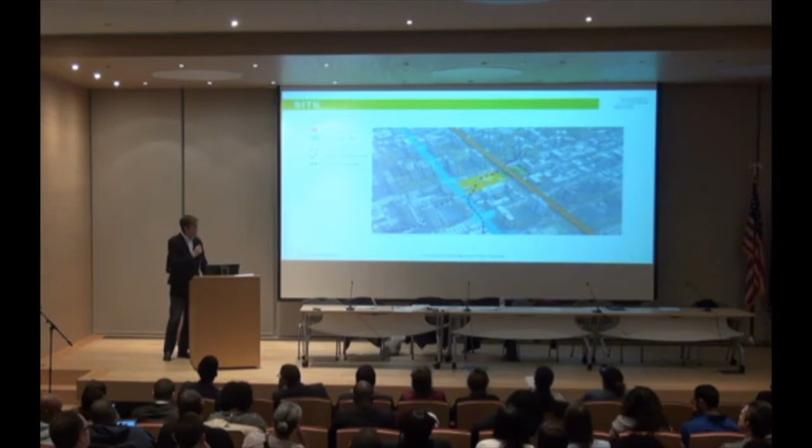This also shows you the characteristics of the streets, which you know well: a somewhat strong retail presence on Madison Avenue, less so elsewhere, and certainly the elevated railroad on Park Avenue. Those conditions gave us some fuel for thinking about how we would organize the massing of the site.

This diagram shows our conceptual thinking when we first approached this in the design competition, thinking about taking as much floor area as would normally fit within the zoning envelope of the block, and how we could reorganize that to provide up to approximately 650 affordable housing units.

It's a very dense site, very ambitious in terms of our programming. On top of that are the 4 different community partners that Sarah was just mentioning, and this gives you an idea of what our thoughts were.

So this would be the block as it normally would be conceived, and those little missing teeth in the continuity of the street wall are actually out parcels. They're not part of our site or property of the city, so they weren't included in our design response, but we had to work with that and work around it.

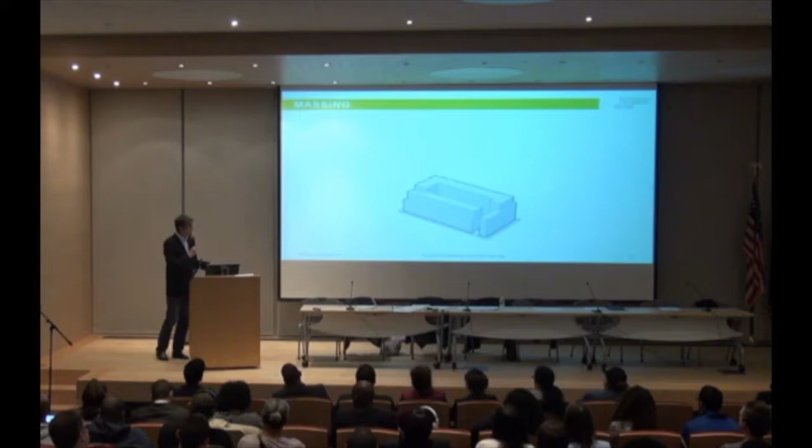So imagine removing a portion of that continuous street wall to provide space for the 4 community gardens we're also preserving on this block, but rearranged in a different location than they are currently. Our goal was to place those gardens on the south side of the block to maximize daylight and sunlight opportunities for those gardens so that they could thrive and grow.

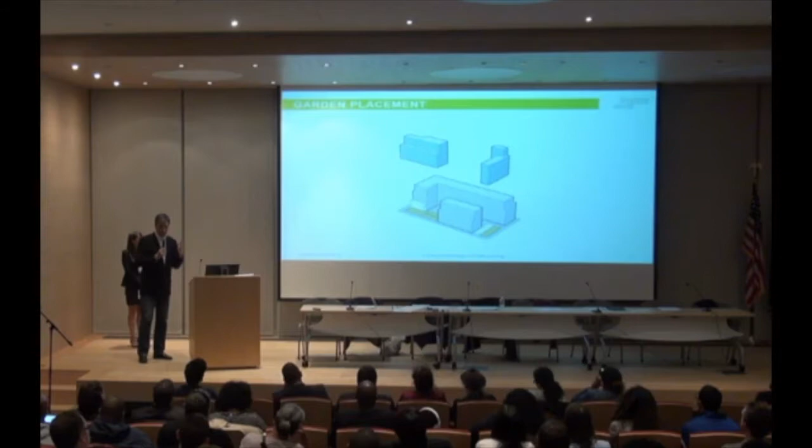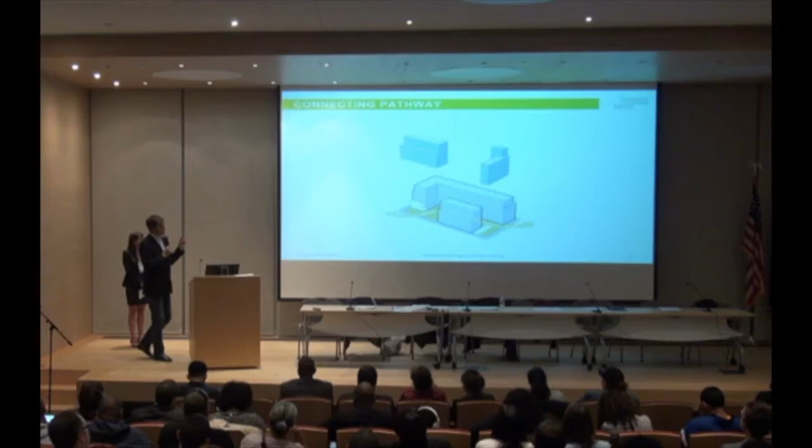And then you'll see a center space in the middle of the block. That was the idea of creating this new path, this new public access to the center court of the whole block, so there's a public access concept linking the community gardens as well as the center courtyard space, all publicly accessible.

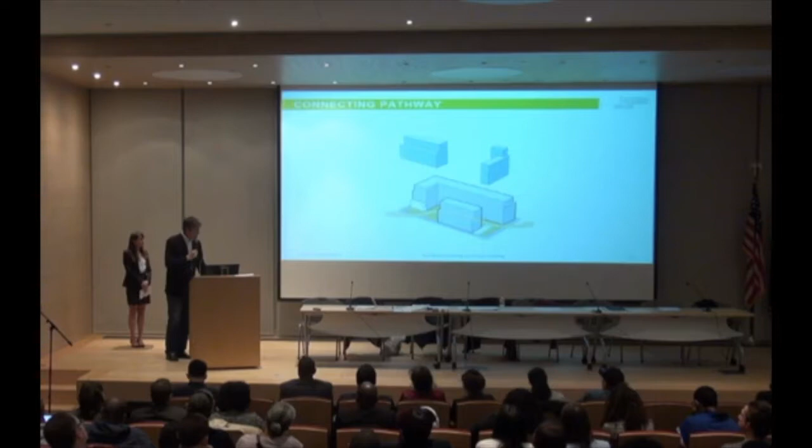Then we looked at lowering the height of the south building, what we call Building C, along 111th Street, in order to gain more light into the block, particularly the center, as well as to enhance daylight conditions for all the new housing units composed within the building blocks themselves.

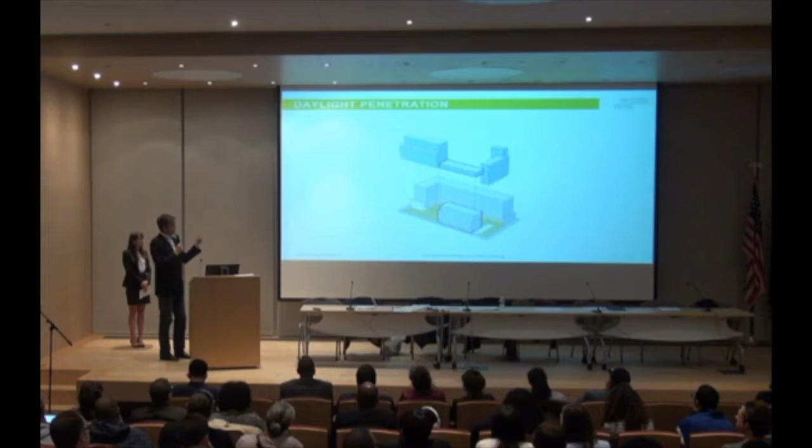And then all that dark blue stuff up there—we're elevating the center court approximately 12 feet to accommodate some very large volume spaces that comprise the community facilities in the basement of the building. I'll show you some plan diagrams of how that works.

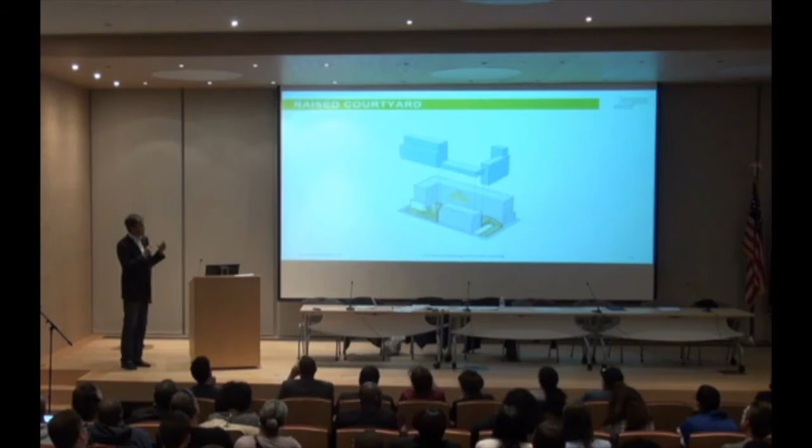So we're elevating the ground plane, if you will, in the center court and providing connections for the public through that center space, lifted up 12 feet off the street level.

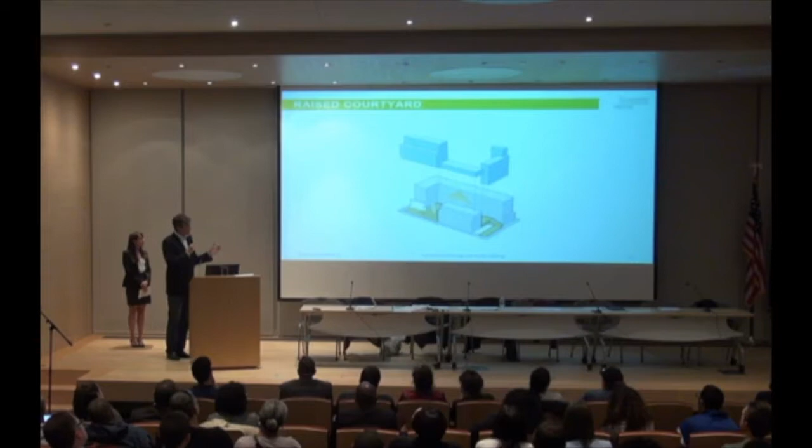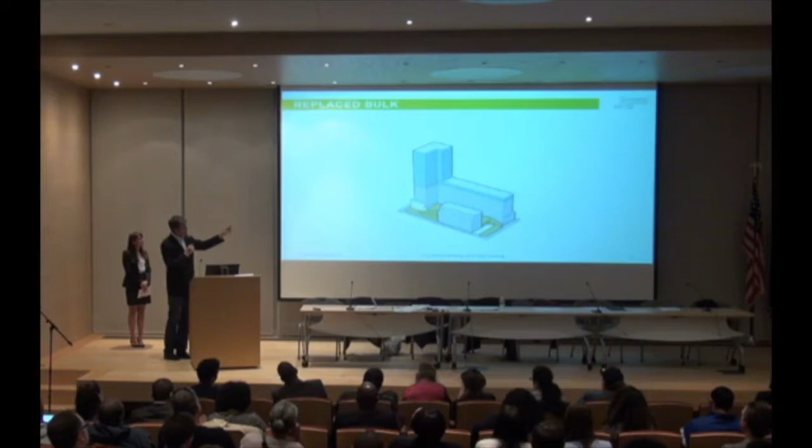And then all that floor area, in order to get to our 650 units of affordable housing, gets concentrated on the northwest corner in a tower, what we call Building A, with a bit more piled on top of the school on the 112th Street side, which is Building B. That was the way we conceived of organizing the block to maximize daylight around the center and get southeast, southwest light into the center of the block.

This is the basic composition of the project and its size: over approximately 655 affordable units. The total gross floor area of the project, including the basements, is about 780,000 square feet.

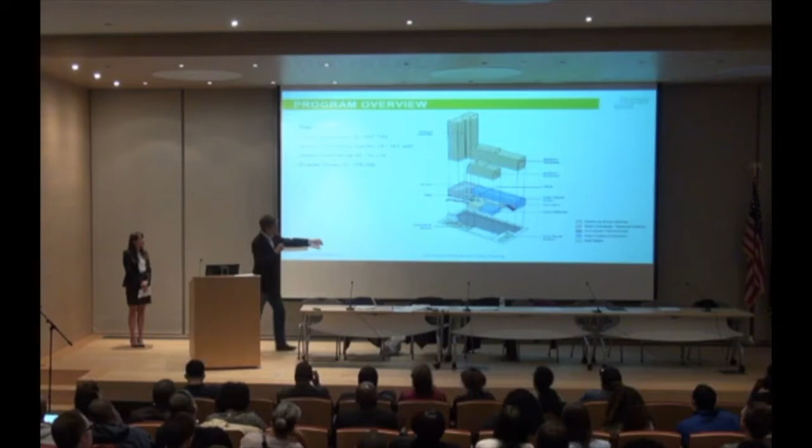You can see the major components: yellow above is residential, and a small piece here, also on 111th Street, is Union Settlement, which comprises a portion of the 111th Street frontage. The Dream Charter School takes up a significant portion of the 112th Street frontage, from the corner of Park Avenue to about the mid-block portion. The YMCA, as well as Mount Sinai, have entrances along 112th Street.

And then on Madison Avenue here, there's some retail frontage on the ground floor plane.

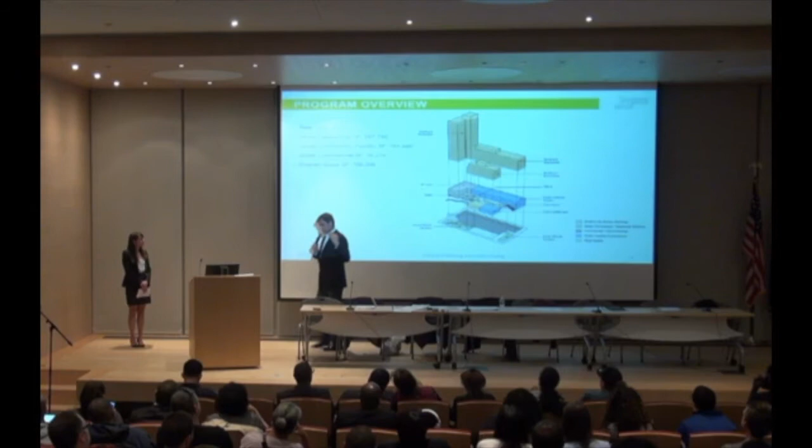So this is a ground plan. We're looking at mostly the first floor, and then the center portion, where you can see a basketball court laid out on the right, and two swimming pools laid out on the left, with an auditorium in the middle. Those components are down about 12 feet below grade, but because of the volume, a space like this has to stick up another 12 feet or so.

So that is how the center of the site is organized, with the public accessible space in the center. You can see the 4 community gardens laid out side by side, two and two. That white spot is the out parcel I was talking about before. Each of the arrows along the upper portion of the plan show the different entry points to the school at the corner, the residential portion of Building B, which is that brown zone in the center. The YMCA entrance is the blue area, another residential lobby, and then the retail space and the Mount Sinai office space entrances connected there too.

And then Union Settlement is the blue area in the bottom right, and then a residential lobby and support spaces for the residential component above that.

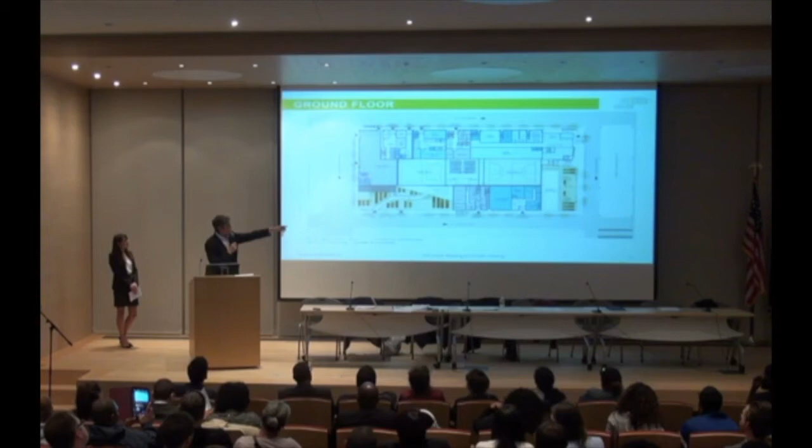This is the second level plan, and it really shows our conceptual layout for the open space in the center. This has not been detailed nor finely programmed yet—that's going to be part of our process. I'm sure there's going to be a lot of input from the community in terms of how all that worked, but our design intention was to create little pockets of space on the second level for each of the community partners to have some outdoor access space.

For example, Mount Sinai might have a health court over here. The school might have an outdoor eating area right off the cafeteria. Fitness spaces over here for the Y might be able to expand out into the open space. And the senior housing located here might have what we call a porch facing out, using part of that space. The layout is really intended to create a nice connection from one end to the other.

At the far end—does this have a zapper or laser? I don't want to press the wrong button.

There we go. So you see here a grand stair that connects the sidewalk on Park Avenue up onto the court, and then back down a ramp that links the other two community gardens right down to grade.

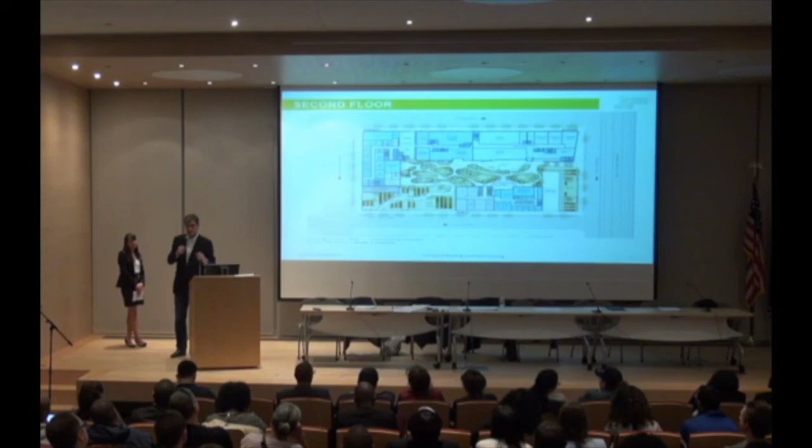This is a fully accessible outdoor space, and the gardens are fully accessible also. There's an elevator located here, combined with a stair, in order to get up that 12 feet to the center court space. All that is intended to be an open flow of pedestrian and community use in the center portion, and then the community gardens are connected by a sinuous ramp that comes down and connects to the corner at Madison Avenue.

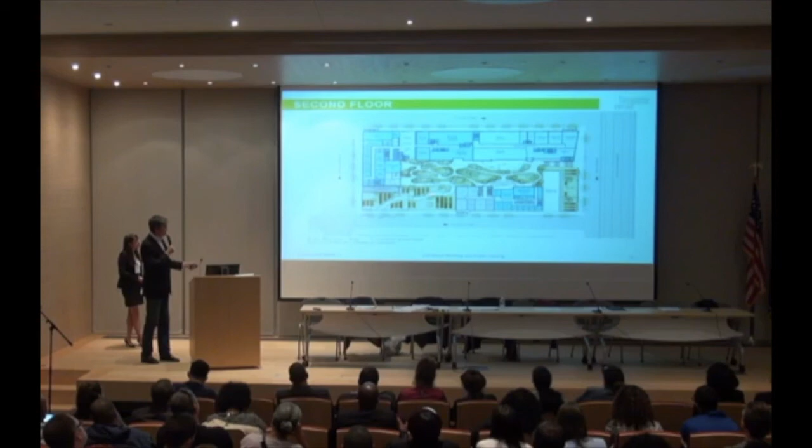Oh, lost the button. There we go.

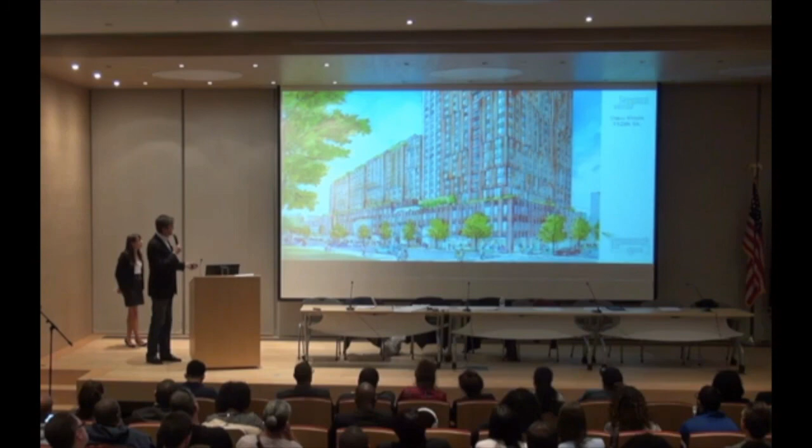The goal in our design approach for the building was really to try to find ways to break down the scale of a not insignificantly large project. You can see a series of setbacks, particularly along this portion of the building—about 45 feet along here, another about 60 feet there, rising up to about 130 feet here, and 420 feet for the tower proper.